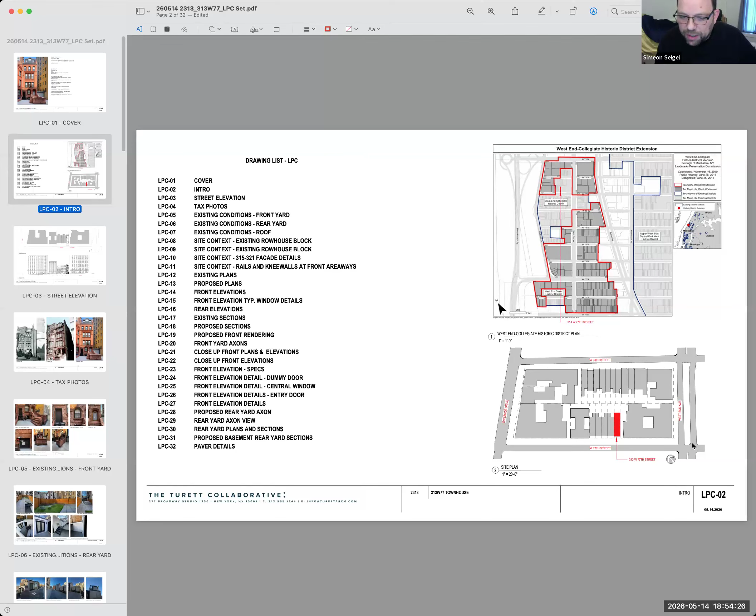I'll quickly go through so you're familiar with where we are. We're mid-block on the north side of 77th Street, between Riverside and West End. As you can see, we've got the giant buildings at the corners. There was once a row of 11 of these houses, I think. We are of the remaining 5, and we are, I think, nicely the most intact.

On the left is a tax photo from 1940. Interestingly, in 1940 the windows were not divided lights. By the 80s they were divided, and then at some point in the interim they became undivided again. We are proposing ultimately, this is not part of the LPC hearing, but we'll be replacing the windows just to make them better performing windows, but they will remain undivided.

You can see in the middle photo, the 1980 photo, you can just about make out the grill on the window. There's also likewise a grill on the door, and there was a grill on the dummy door. You can also see, in the middle of the front facade existing, at sidewalk level there's a funky grill. That was historically a window, and we'll restore that to a window. There's a mechanical room behind that, but the grill is not necessary and it's unsightly, and we'd like to restore the window to the original condition. That's not actually part of the presentation because LPC staff will approve that at staff level, but just to complete the story, that's part of the repairs here.

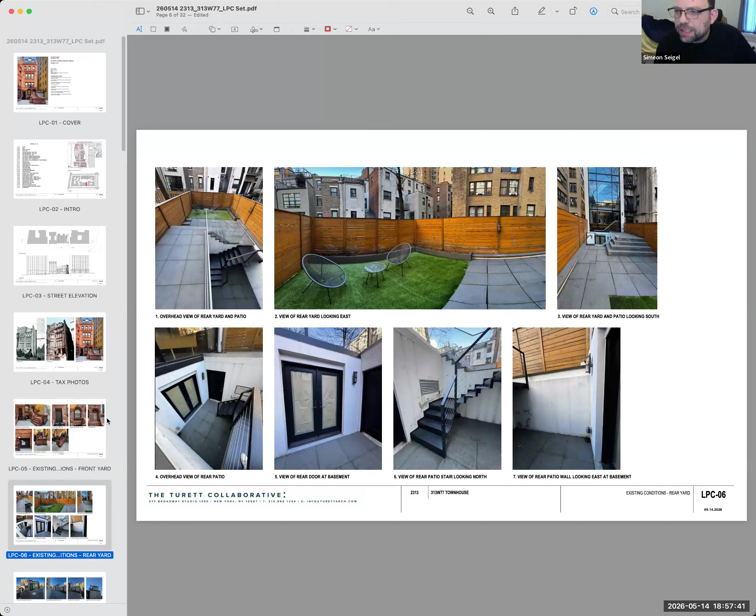You mentioned restoring the grille on the front door. Do you have a photo of that type of grille, or a rendering? Yes, I will show you what we are proposing for that grille.

It's a good point, I said restoring. What I meant is we are producing a grille for that in the style we think will be appropriate. That will be part of our application. I'll show you that image when I get to it.

Existing rear yard. I'm only showing you this because it's a little hard to envision the levels here. But on the upper left, you can see there's a sort of sunken patio. That sunken patio is below grade, at a cellar level. So we are demolishing these elements, they leak, they house vermin, etc. So we're going to be replacing some of this work.

I don't know, would you like me to explain in greater detail what we're proposing for this rear yard, or is that not a concern right now? I don't mind, whichever. A quick explanation would be nice. Is it going before the commission, or is it a staff level approval?

There are limited pieces going to the commission. The piece that has to go to the commission is we are making a new window on the rear facade. The lower left image, if you can make this out, the left side of that image is our rear facade. This is the sunken patio level. That black door you see, let's call that a shed. We're demolishing that shed because it's disgusting, and we'll replace it with a glass bridge. When we demolish that shed, there will be a new exposure, and we're going to make a window there. I'll show you in an elevation, it'll be clear enough. Okay, thank you.

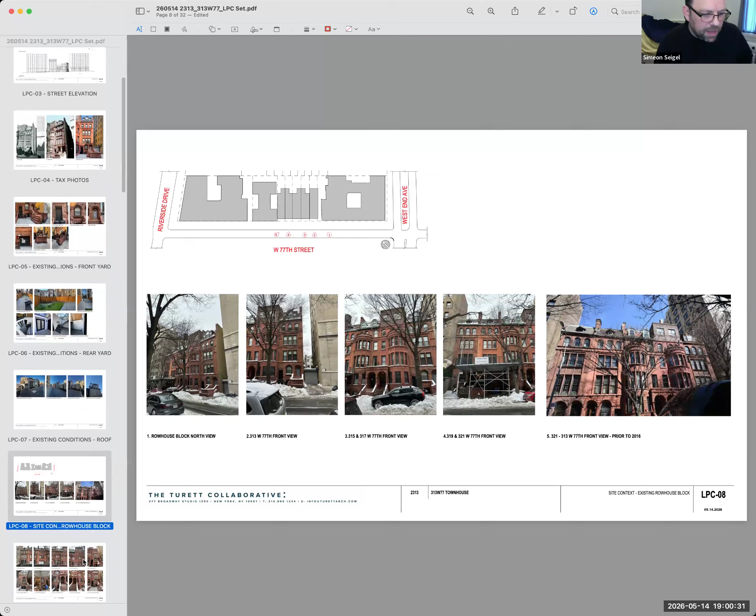Let me move past, we can come back if anybody wants to see photos of neighbors and stuff, but for now I'll treat this as an appendix. We have images of the neighbors' doors as well. There's an interesting mix of different steel gates, some more deco, some more... anyway, there are many different styles. We are proposing something a little bit more like 317, this one in the middle, slightly more deco.

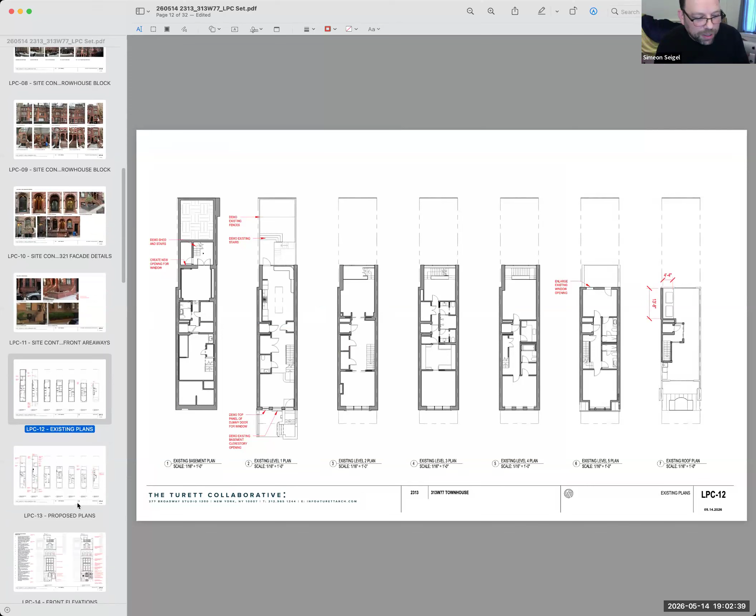This describes the scope we've all just discussed. I apologize, the presentation became so big because at one point it included a ton of stuff. Fortunately with staff we were able to pare it down to just the elements the commission will review, and I think we can pare this down to a more expedient presentation as well. But for now, we have all this information here.

This details the processes we need to use to restore the brownstone and treat it. For the purposes of this presentation, we're going to do it extremely well. We have to use the appropriate materials and cleaners.

This is the rear facade. On the left is the existing condition. There's this enclosed shed, we'll demolish that, and replace it with a glass and steel bridge, but we'll introduce a new window under it. While we're at it, currently the doors back there are outswing casements, and we're going to replace them with sliders.

If you go to the top of the elevations, you can see on the left there's an existing window, we're going to make it wider. That's a setback elevation. At the roof, we're replacing the paneling on the bulkheads with stucco, and we'll be adding a screen to screen off the mechanical units.

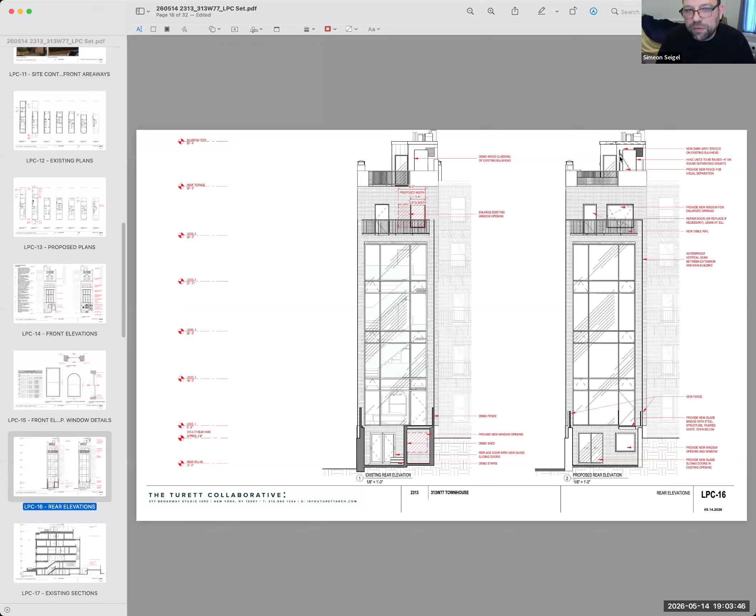The only use of this section at this point is you can see on the right side the sunken condition of the rear yard. That's the existing shed that we'll be demolishing. It's sort of an unusual condition because our cellar is ultimately at the same level as the neighbors to the north. Their rear yard is at our cellar level, so it's a little confusing. It looks like our rear yard is sort of built up.

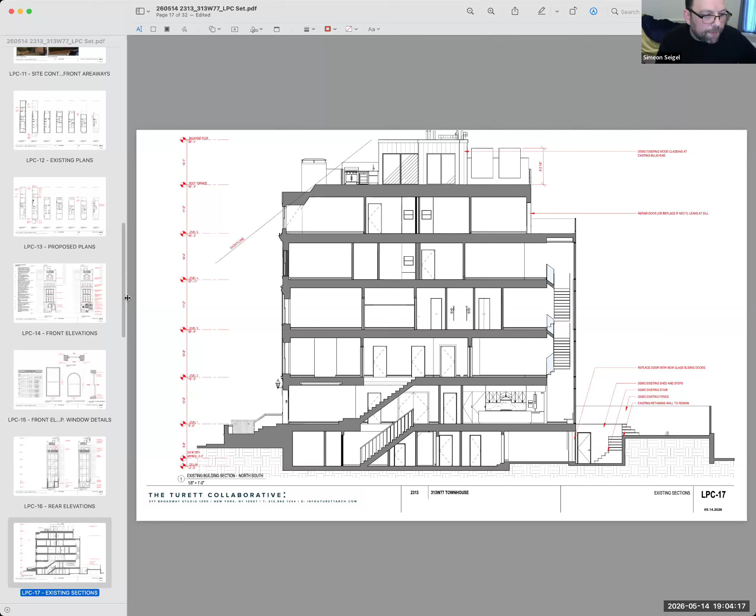And Landmarks asked us to remove it, they said simpler is better. I don't feel strongly, that's interesting. Yeah, it's interesting because one of our colleagues who's not here asked us to ask you specifically about making it more in line with the flourishes. So you're saying the feedback you received was something different? That's interesting. I would add my voice to that record, because that's exactly what I was going to say. I'd even like to see something a little bit more. Yes, I agree. Yeah, so they asked us to make it as simple as possible.

I honestly don't really understand the argument, and maybe I'll find out more from staff before we present it. But the part I'm more familiar with, as we discuss these things with staff, is the question of whether this looks like we're distinguishing the new stuff from the old stuff appropriately. Are we making it look like we're trying to make this look historic, or are we trying to set off the new?

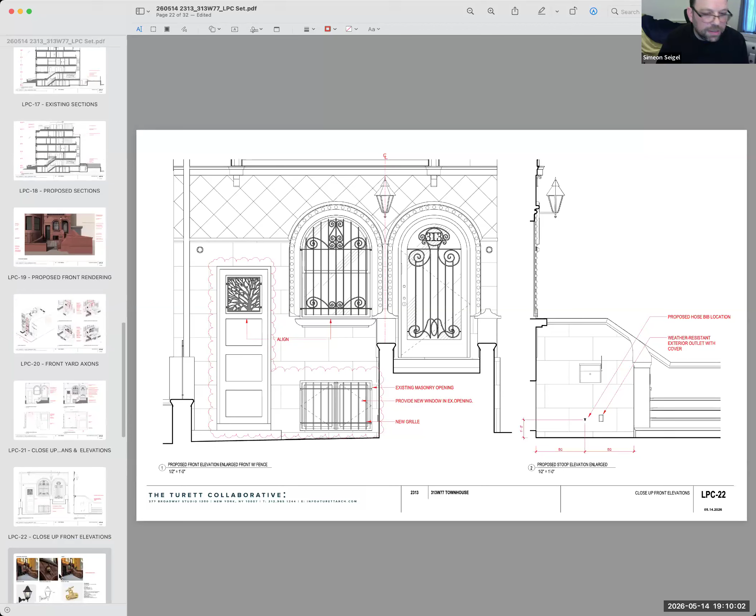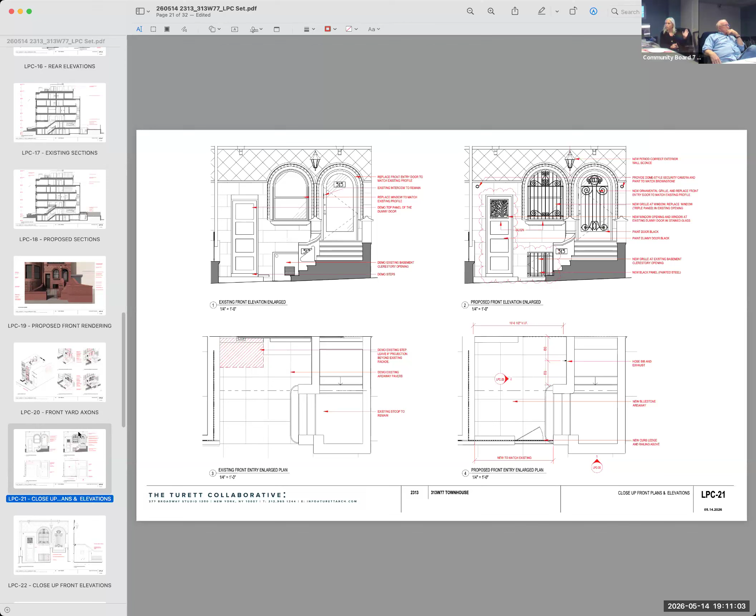Let's go back to the ironwork, just because we're right here. One of our colleagues who's not in the room but did visit the property had some specific feedback: the ironwork is beautiful and would like to see it more cohesive. The tree of life isn't offensive, but it seems a little out of place in light of the beautiful intricate work elsewhere. If there weren't intricate work elsewhere, perhaps it would seem on point. But in addition, the starkness of your front fence in contrast to the neighbor's fence with the motif is also a little incongruous there.

But did LPC specifically say they want nothing on the iron, or did they just say they want it plain? We originally modeled it to match the neighbor's fence exactly in the rendering, and they asked us to remove it. I can see the neighbor's has that ornament up high, at a 5-foot level, and our fence cuts off shorter, so arguably they are in fact the same—ours just hasn't risen to the extreme height of theirs, and it would be weird for ours to be as high. So below the 42-inch level, they are in fact the same, and maybe that's the argument. So was it at staff level that they told you to leave it plain? That was at staff level, correct.

Yeah, of course. Oh, thank you. I mean, frankly...

I agree with Clary on the ornamentation, the grill work, which is hard to see in this, but what you showed us is really nice and appropriate. Considering all the design work in the brownstone, I would agree with at least the way you presented it originally. I'd suggest that since you have a lower fence, you could do something different, consistent with what you've got on the front window and the door. But on this building, it seems to be a plain, modern looking fence. It doesn't do it.

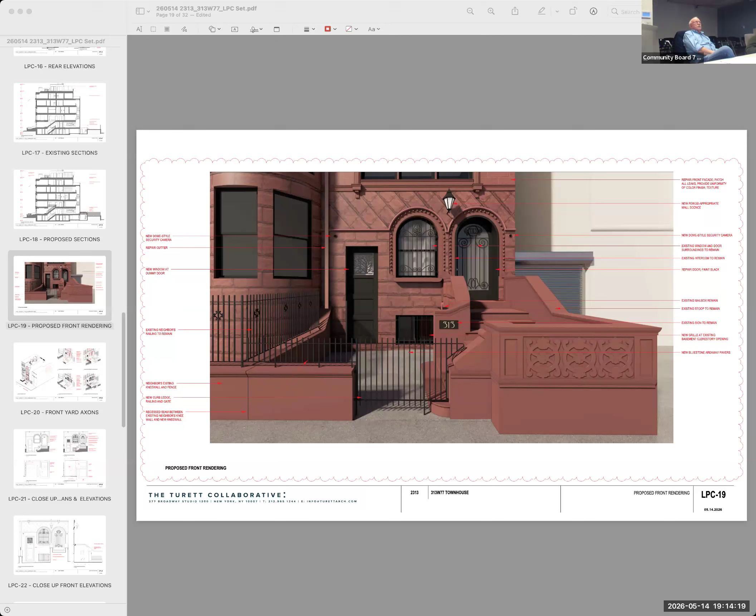Excellent. Given that, do people have questions other than the ornate ironwork? Do people have other questions about the facade, the blind window, the dummy door, anything like that? Otherwise, I would suggest we throw up the resolution and add some language to get to what sounds like there's a consensus in the room.

I don't think we're quite ready yet, because there's a couple more things we want to speak about. I would like to speak about that window and the dummy door. It just complicates everything - it doesn't blend or enhance anything, it just complicates it. It's a completely different angular kind of thing than the others, which are so flowing and round.

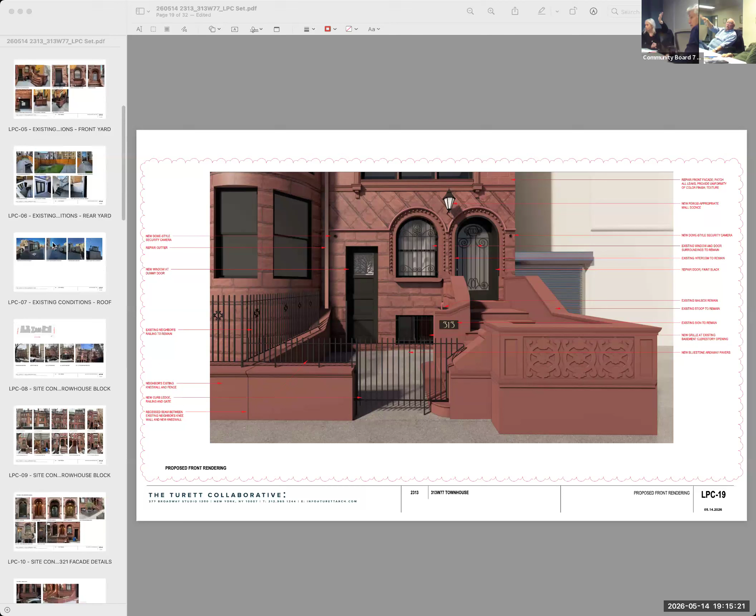I would agree, so the question is, what can you do with the doorway? You're not going to close it up. No, but make the ironwork more consistent with the beautiful scrolls on the other side. It's my opinion, it's the same argument or feeling as the railing - you want something that's a little enhanced, more ornate and worthy of the building. So I agree with that.

Simeon, was there any thought to doing something besides the window on the dummy door, some decorative ironwork on the door? You mean the door itself and not the window, the dummy door? There could be a comprehensive design - it may include something on the window, it may encompass the glass. I don't feel qualified to say this is what should be on the window, but it just seems too barren for this.

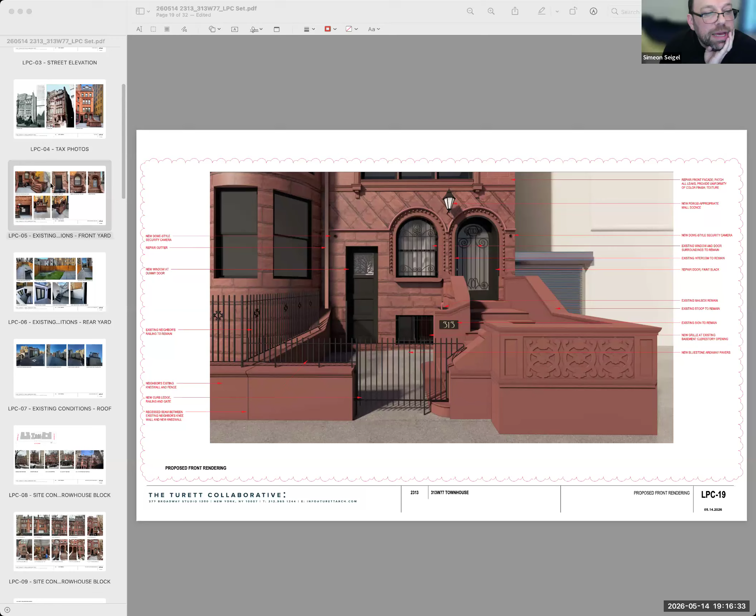It's a strange condition, and you can see it - if you look on the left, the original condition was a wood stile and rail door, a blank door with a glass transom. Over time, I don't know what's behind it in the 1980s photo, but there was some ornamental steel in front of it. In the interim, the door is in fact a blank - it's a dummy. Only the transom admits light to a living space, so that's the only place where we can introduce the window, and that would be the only place where it would look appropriate.

As far as we were aiming, we were modeling ourselves on the 1940s, thinking that's the closest example of how these doors would have worked. It's a real door - in those days it would have been not a dummy door, but a servant door, very secondary clearly. I almost think the highly ornamental steel in the 1980s photo isn't really correct, meaning it should be like the left photo where it's simple. The question is, are we overdoing it with the tree of life motif? Should it be more simple, the smaller piece for the transom, should it match more in style with the other steel grills? We did not contemplate redesigning the door as a whole because the 1940s photos seem to support leaving it blank.

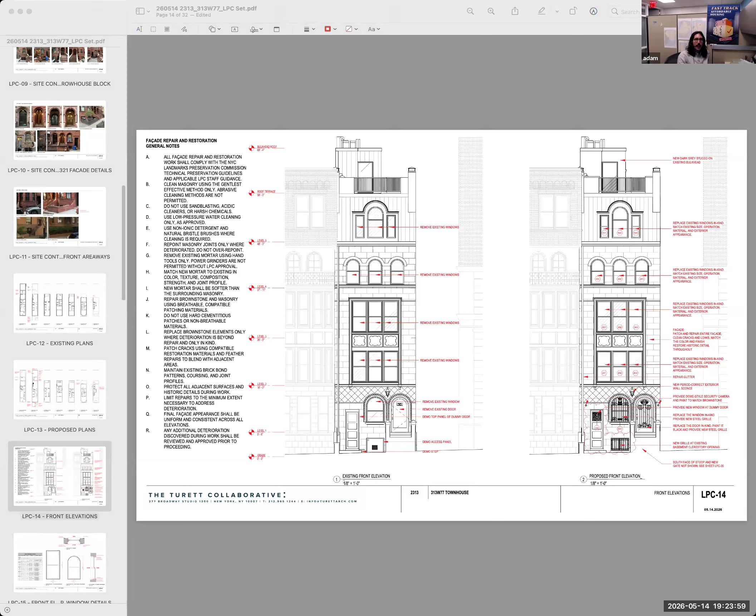I was going to say we should pass a resolution thanking Madge, but we don't have to since they did it at the full board. That was really nice. Can we ask you to please come to the next meeting? I'd love to, yeah, I was going to do it anyway. You could tune in on Zoom, but maybe come in person. Please, please come.

The summer is really the break. Next month it's June 11th, I think. Then there's no meeting. Any other new business?

Adam, have you and Jennifer considered a summer meeting? When I co-chaired the committee, we met in July and August if need be, to keep up with things since it's small. What we'll do is the same as last year: if an applicant comes, we will meet, but if no one brings an application, we won't.

I think LPC probably tells applicants that community boards are hard to reach over the summer. I'm not going to tell LPC to schedule meetings for us. No, I don't worry, Jen is not gonna let anything get lost, no summer break. That's fine, as long as you guys are willing to do it.